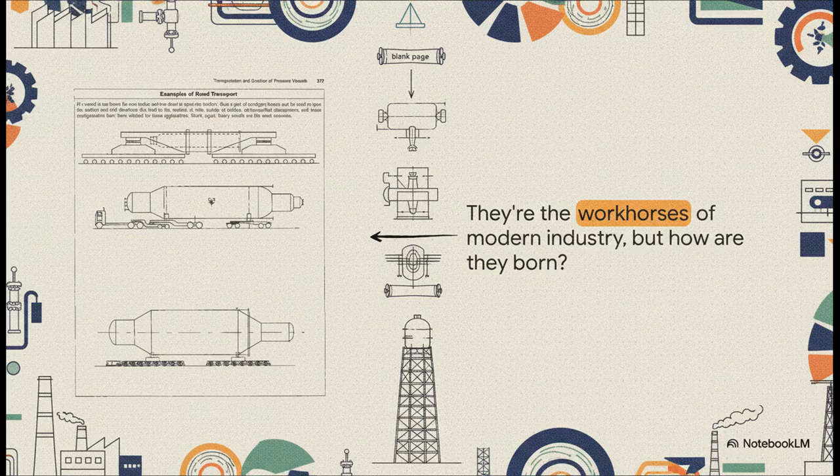So, in this explainer, we're going to follow their entire epic journey, all the way from a blank page to a towering, finished structure. So, how do you even begin to create something so massive and so strong? Well, it all starts with the design. And for a pressure vessel, the number one rule is brutally simple. It absolutely cannot fail. Now, the primary enemy isn't just the pressure trying to push out, it's actually the forces trying to crush the vessel from the outside.

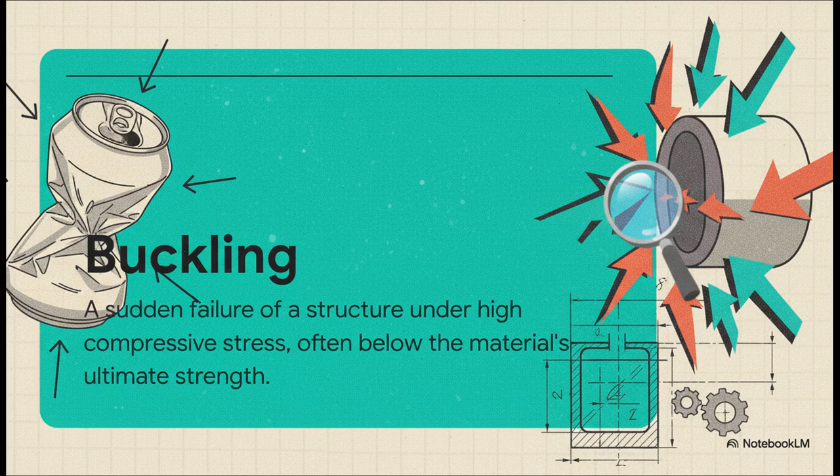This can lead to a failure mode called buckling. The best way to think about it is crushing an empty soda can. It doesn't just neatly compress, right? It suddenly and catastrophically crumples. That's buckling. And that is exactly what engineers are designing to prevent.

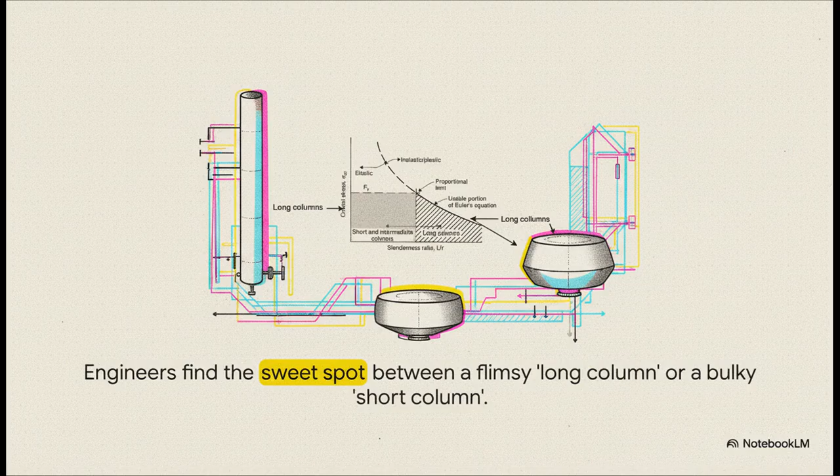So how do they predict that soda can moment? They use this fascinating concept called the slenderness ratio. It's basically the relationship between the vessel's length and its radius. See, if it's too long and skinny, what they call a long column, it buckles super easily. But if it's too short and stout, it's strong but really inefficient and heavy. The real art of the engineering here is finding that perfect sweet spot right in the middle.

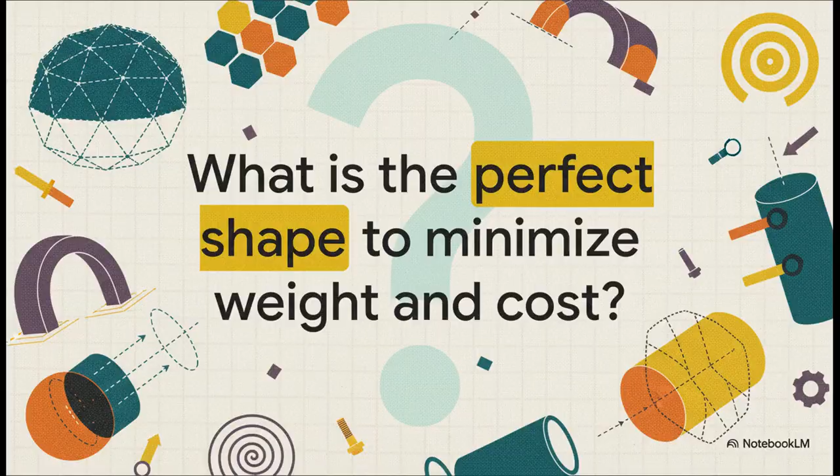Okay, so we know how to stop it from collapsing under all those external forces. But what's the most efficient design to begin with? To hold all that pressure inside while using the least amount of material possible. Well, mathematically, the perfect shape is actually a sphere. It holds the most volume for the least amount of surface area. The problem? Spheres are an absolute nightmare to manufacture. And that's why you see cylinders everywhere. They're just far more economical to build.

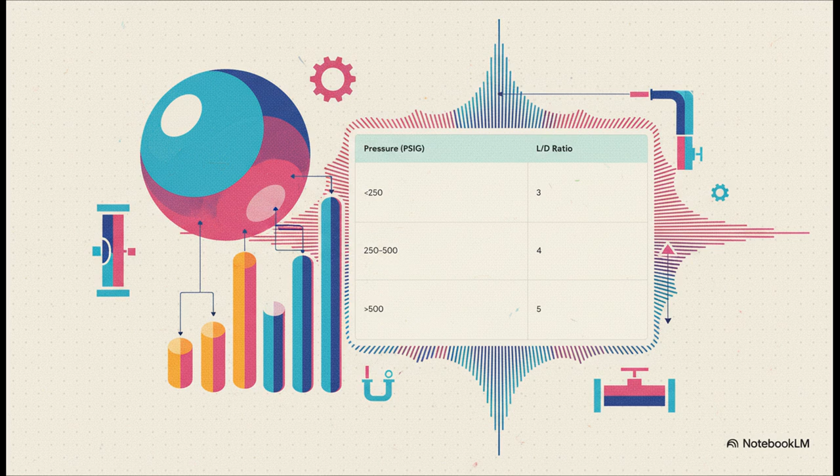The key then becomes finding that ideal length to diameter ratio, or L/D ratio. And as you can see, that ratio changes with pressure. For lower pressures, a shorter, squatter vessel works just fine. But as that pressure climbs, you need a longer, more slender design to handle the forces efficiently.

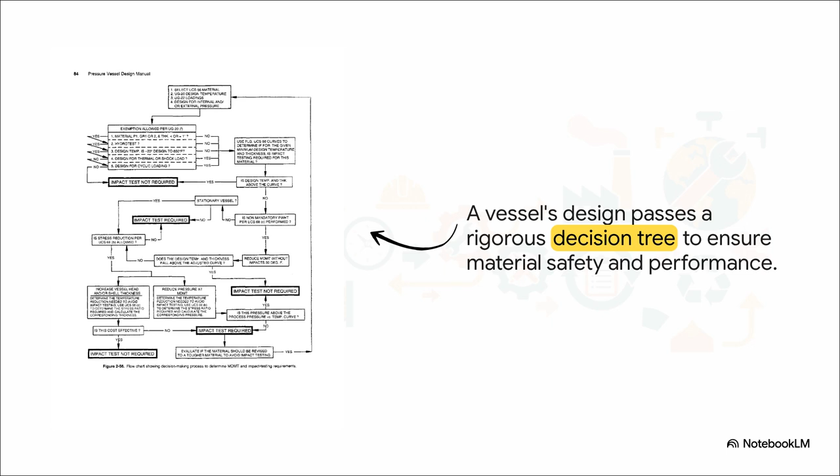This is a great reminder that the design is so much more than just shape and size. It's a dizzying matrix of decisions. I mean, look at this flowchart. This shows the process for just one tiny aspect, material impact testing. Engineers have to account for literally everything, from temperature to shock loads, and every single choice they make sends them down a different path on this tree, all to guarantee the final product is absolutely, unequivocally safe.

All right, let's move on. The vessel is perfectly designed to contain pressure. But now, this massive, heavy object has to be supported, either in a factory or out in the field. And believe me, how you hold it up is just as critical as how you build it in the first place. So how a vessel is oriented fundamentally changes the physics of the whole thing.

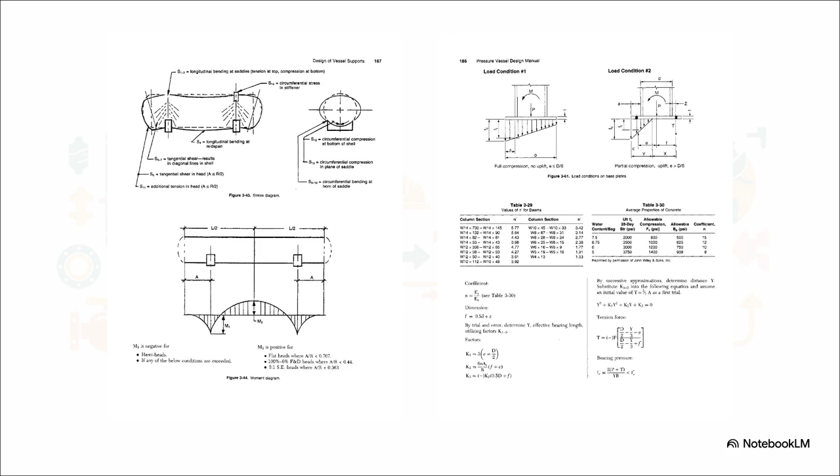Let's just focus on the horizontal saddle for a second. Imagine you're carrying a really heavy log on your shoulders. The log wants to sag in the middle, right? That creates tension on the bottom and compression on the top. It also creates this intense, concentrated stress right where it's resting on you. Well, that's exactly what's happening here.

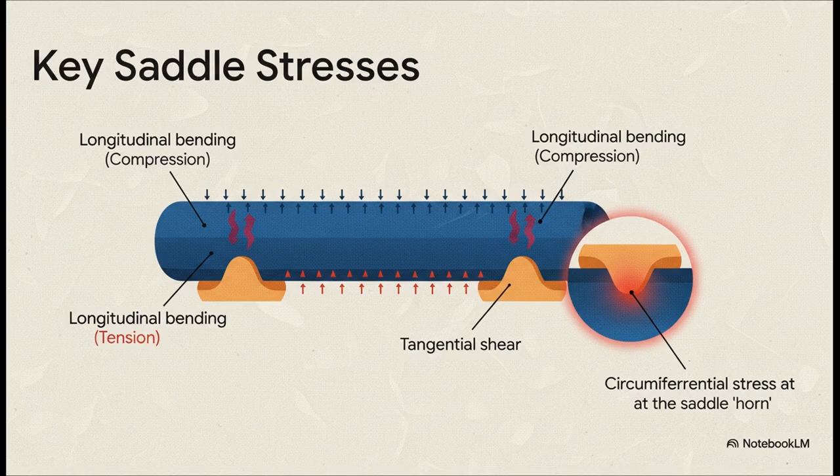The vessel experiences what's called longitudinal bending, shear stress, and this intense circumferential stress right at the horn of the saddle. The math for these supports has to be absolutely perfect. A tiny miscalculation in where you place the saddle or how you reinforce the shell around it can lead to the entire vessel just collapsing under its own weight. There is literally zero room for error.

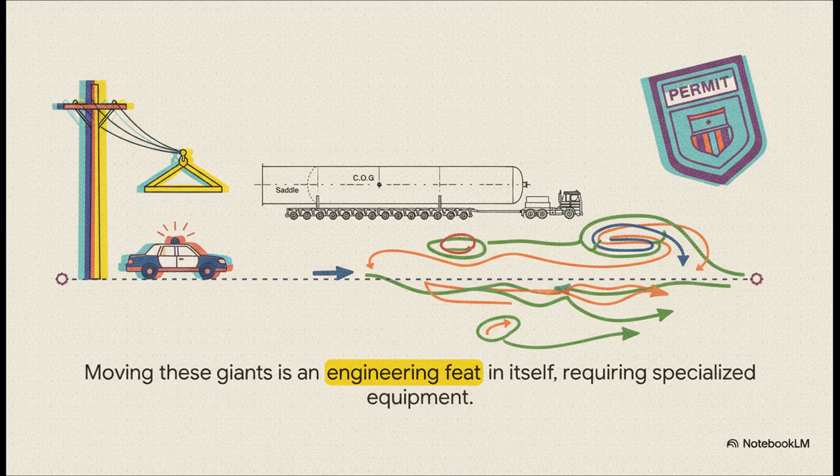Okay, so the blueprint is flawless and the supports are designed. Now comes one of the most visually dramatic parts of the entire process, getting this giant from the fabrication shop to its final home. Moving a multi-ton, 100-foot-long vessel isn't exactly a simple task. It's a massive logistical operation. We're talking specialized multi-axle transporters, detailed route surveys, permits, police escorts, and sometimes they even have to temporarily raise power lines just to get it through.

And often the forces a vessel experiences during transport are far more severe than anything it will ever see in normal operation. This is especially true when it's being shipped by sea. On a calm day, it's just dealing with its own weight. But in a storm, oh boy, the rolling and pitching of that ship introduce enormous dynamic forces.

So just how extreme can those forces get? The answer is pretty astounding, plus 1.5 G. What that means is during a storm, the pitching of the barge can add a vertical force that is 1.5 times the vessel's own weight. Just imagine that for a second. The tie-downs and the vessel itself have to be strong enough to handle that incredible, violent load.

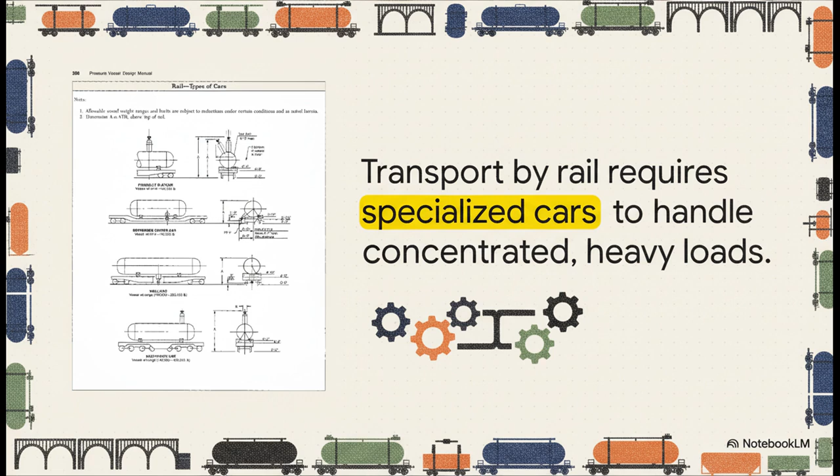Rail transport? Well, that presents its own unique challenges. You can't just throw a vessel on a standard flat car. To handle the concentrated weight and, just as importantly, to clear bridges and tunnels, you need specialized cars. Things like depressed center cars or well cars that actually lower the vessel's profile, making the journey even possible.

So, the vessel has been designed, built, and has somehow survived its epic journey. Now it's time for the grand finale, the most nerve-wracking moment of all, the final lift. This right here is the moment of truth. It's a carefully choreographed ballet of cranes and rigging. It starts with the initial horizontal pick, then a tailing lift starts to rotate the vessel, and then comes the main vertical lift that slowly brings this giant to its final upright position.

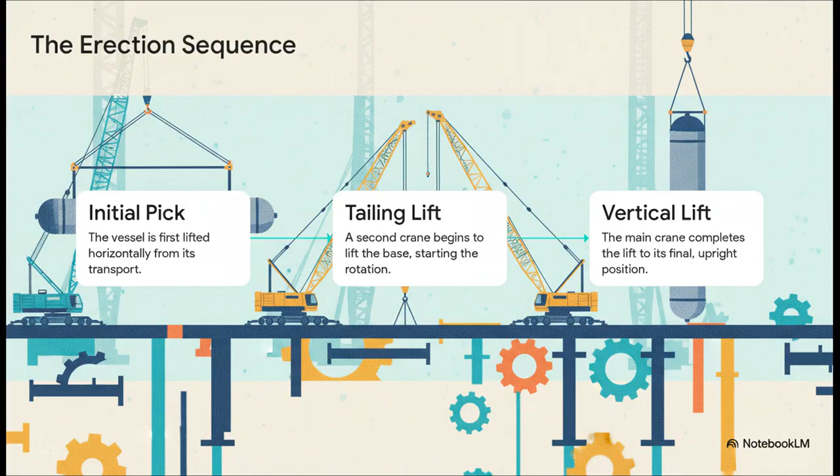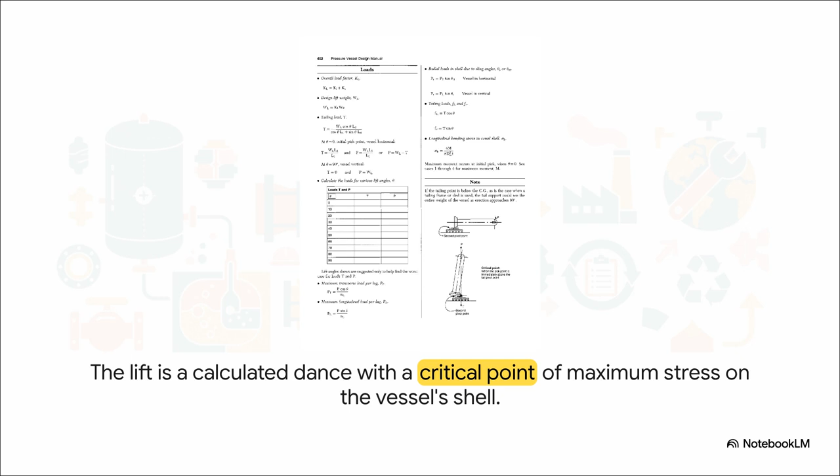But this isn't just about lifting. It's about the physics of the lift. As the vessel rotates from horizontal to vertical, the stresses on its shell are constantly changing. And there's this one specific, heart-stopping moment, what they call the critical point, where the bending stress on the shell reaches its absolute maximum. Every single bit of design and planning has been about successfully and safely passing through that single point of peak stress.

I mean, think about that. Months, sometimes even years of complex calculations, meticulous fabrication, and insane logistical planning, it all comes down to this one single, slow, and deliberate movement. And with that final, careful placement, the journey is complete. The unseen giant is now part of the landscape, ready to do its job for decades.

So the next time you drive by a refinery or a large industrial plant, I really hope you'll see it a little differently. It kind of makes you wonder, right? What other hidden engineering marvels do we pass by every single day?